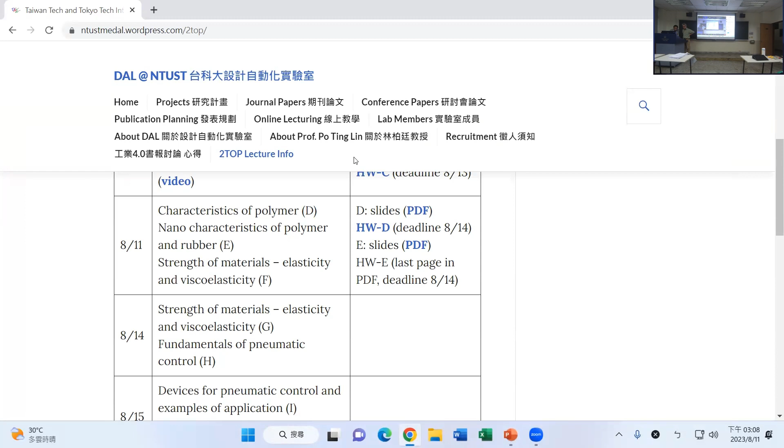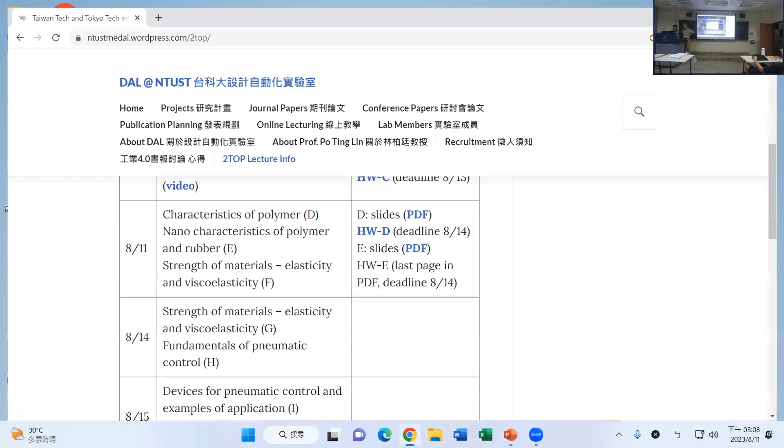Tired. Okay. Can everybody hear me? Can you hear me? And if you can hear me, you should be able to give me a thumbs up or something, right? No? Okay. Wait a minute. If somebody asks me a question, where am I supposed to go? Okay. If somebody sends me a chat or something. Chat, yeah. Okay. Oh, got it. Click the icon. And if they have any question. Okay. All right. Okay.

Good. I bet everybody is so tired by now and wants to get out of the class ASAP, and we can do that. But I'm getting paid, so I have to talk about something, right?

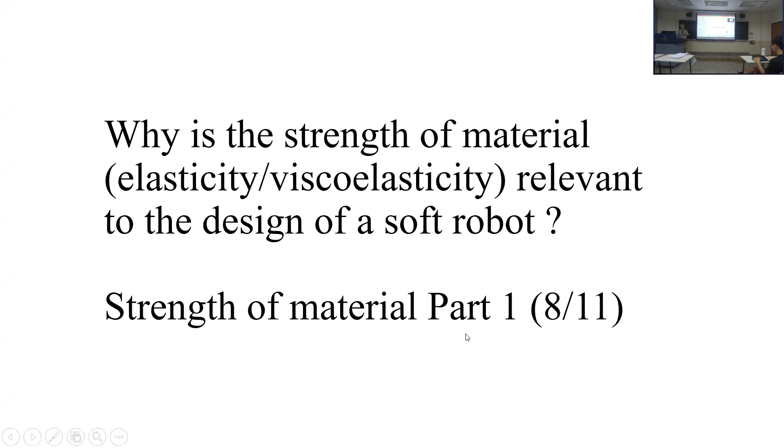So today I would like to talk about reviewing the statics and dynamics, so that you find out later we need to have the knowledge of strengths of material to design soft robots, more or less. So today's part is more like a review of the statics and dynamics. Good. All right. Here we go. Statics and dynamics. And here's the video.

Can I see it? Can I think to? Oh, okay. Here we go.

I found this website talking about the wall climbing robot. Can I play this? This is not exactly a soft robot we are thinking about, but part of this wall climbing robot is actually soft, right? Here's a robot sticking to the wall and gliding up. This part is hard structure, but you can see this belt is sticky and soft. So definitely we can treat this belt part, the caterpillar part, as the soft robot.

So basically, I will use this to review the statics and dynamics. And at the end, I hope I can convince you why we need to know the strengths of material. Okay. So here we go. This is the wall climbing robot, created by Simon Fraser, a university in Canada. So what we know is this wall is vertical.

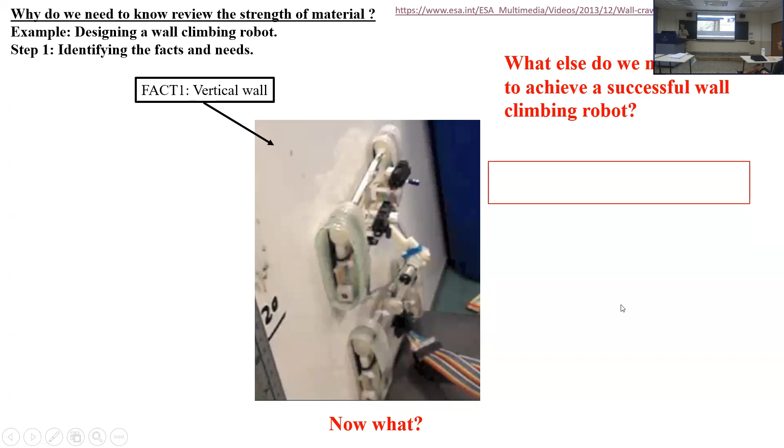All right. What else do we know? What do we know about this robot? There is a wall, and the robot is moving sideways, down or up, right? Moving up. Good. So something is moving, then that means I should be able to measure the acceleration and then later velocity, right? Good. And what else do we know?

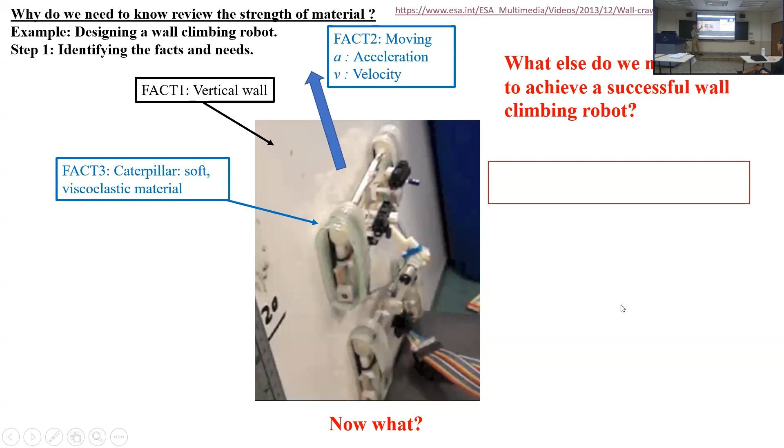Here we go. We have a caterpillar. As I said, this part is definitely rigid, but the caterpillar part is soft and viscous, sticky. Sticky material usually is viscoelastic, right? Are we okay? Then another part is, this structure has a weight. Each part, we can break this down into the caterpillar parts, 1, 2, 3, 4. And in the center, we have 2 links. Very crude, but we can build this as 6 parts, right?

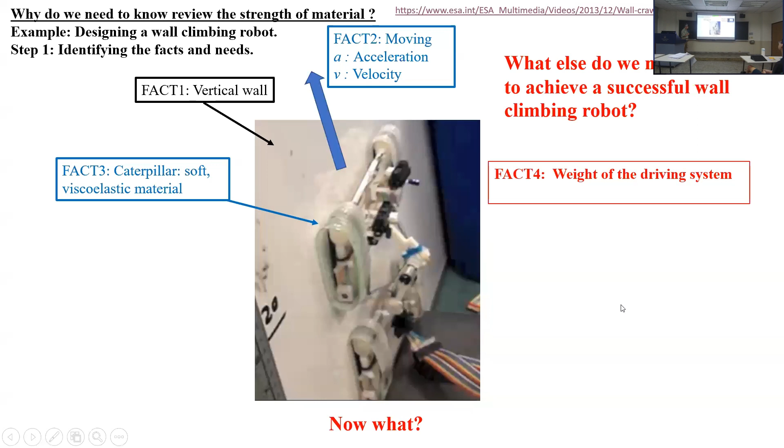Then another fact is we can simplify the weight of this caterpillar driving system as being at the center here. And also we see a link, right? Weight of the link. Of course, this is distributed. If you want to model this as a distributed loading, that's fine too. But at the first step of design, I think it's okay to build this as one mass concentrated at the center. So these are the weights of the links. Good.

All right. And there is another cable. Clearly, we can make a battery-powered system too, but this system had a cable. So if this robot slides up more, this cable will start pulling down, right? So tension force. Good. Then this is the basic specification of this specific robot.

Then what do we need to do after this? If you're a mechanical engineer, what do we need to do after these specifications are given? What do we usually do? What did the teacher tell you to do when you were a freshman or sophomore, when you took statics and dynamics?

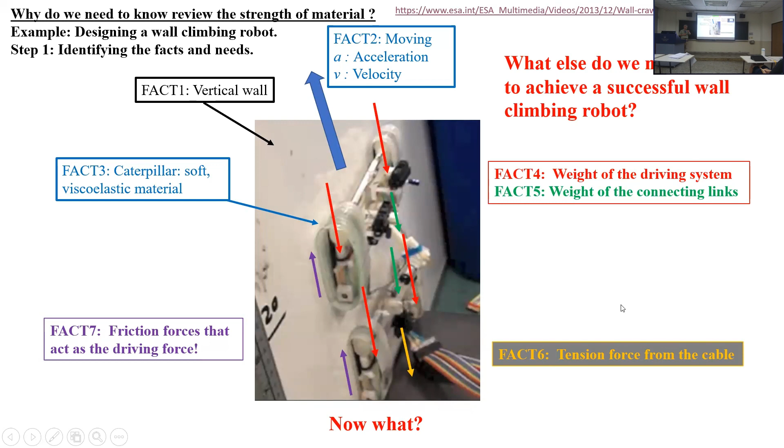So specifications are given. Then usually in mechanical engineering, we have to draw a diagram called a free body diagram. The idea of the free body diagram is pretty much like this, but we can build this from the side. The idea of the free body diagram is basically the structure with all the force information and the acceleration information, or inertial force information, put on here. That's called a free body diagram.

Of course, if you want a more detailed picture, you can do so. You can remove this link out, remove this link out, and draw 1, 2, 3, 4 free body diagrams—we can do so too. But in this case, we're only interested in the movement of the entire system, so I think this is okay.

So the next step is—this was the big picture—we have to somehow put this picture onto here. And that is called the free body diagram.

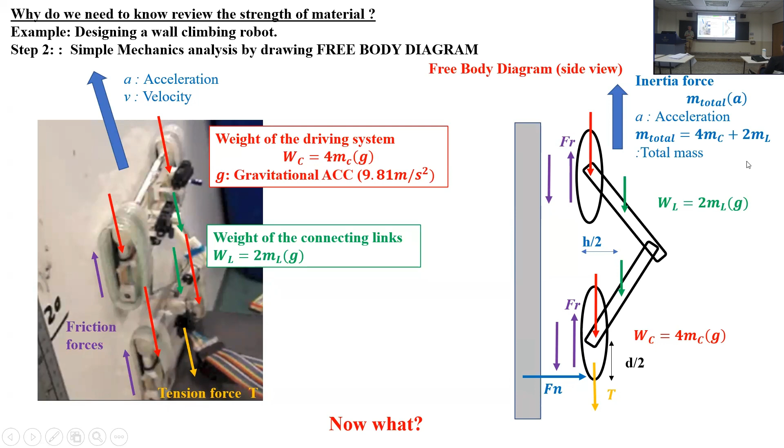So next step is setting up the equation of motion. We have X direction, Y direction, and this is basically moving up. So do you think we can set up an equation of motion in the X direction? How do you think, is this thing moving in that direction? Is it? Yes, no, the answer is very simple. How many of you think it's going to move that way? Or you don't care, that's another answer too.

So how about here? Oh, actually it may, right? Because now we have this. It may, you're right, you get confused, of course. But I'll conveniently say this is going to be ignorable because this is light and this is going to be small. So later I will say this will just be the 1D problem.

So in the Y direction, basically the major action is happening in Y direction. The equation of motion is basically F equals ma. Ma is total mass times acceleration, right? This side is inertial force, and the external force we have here is weight of the link, weight of the caterpillar, friction forces in Y direction, and tension force. This equation makes sense to you? As you can see, this is minus, this is minus, this is minus, so hopefully our friction force is bigger than this and this and this so that we can have acceleration.

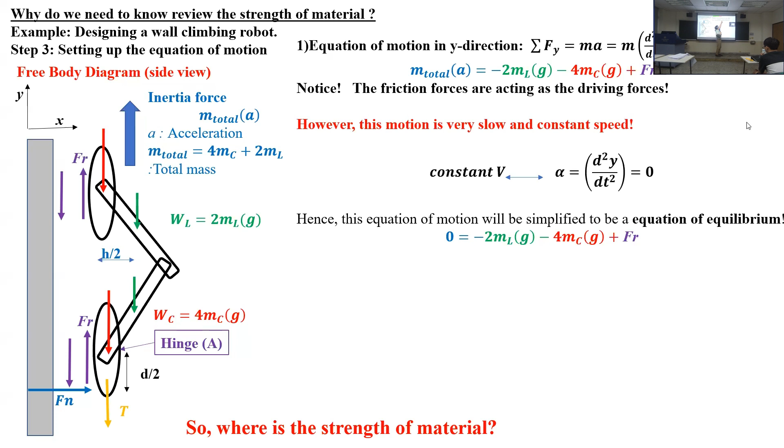No acceleration means this is 0, so that means this side is 0. Right, so constant velocity, acceleration is 0. So we can simplify this equation as this, and this is called the equation of equilibrium. So it's moving, it's still moving, so that feels like it gives us an impression that this is a dynamics problem. But since we all agree the acceleration can be viewed as 0 because of the constant velocity, then we can simplify this problem as a statics problem.

And the other thing is the rotational case. We have to satisfy the equation of equilibrium of the rotation, so we can set it up that way. But as you can see, that robot was not even trying to rotate, so we can say these two parts are very small, and we can ignore this and we can ignore this. So we can just stick to this. This is the equation we need to worry about when we are designing this kind of robot.

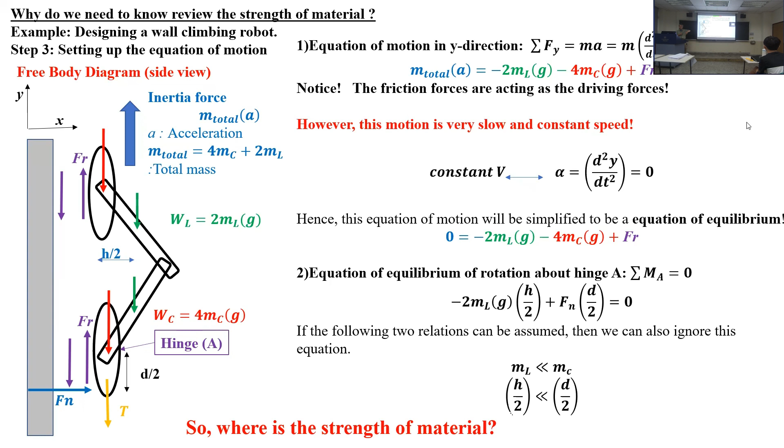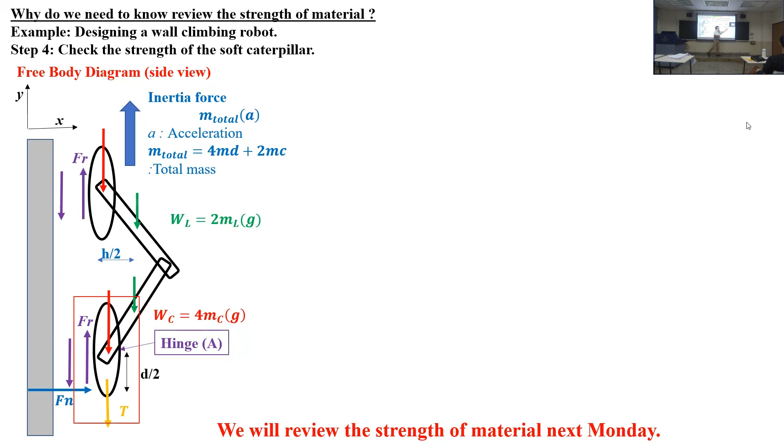And then next step is, finally statics is done, dynamics is done, free body diagram is done. Then we can find out the relationship of all the forces. Then finally we can talk about the strength of materials, that means what kind of force or deformation is happening at each small element. So let's see what will happen.

If you look at this caterpillar, let's assume this belt has certain thickness, elastic, viscoelastic. And on this caterpillar part, we have a weight — I should remove the W, sorry — and tension should be one force. And on this one, we have a friction. Can you see that? I'm enlarging this part to here.

Okay, when things start moving, this rectangular element will not stay this way, right? After I switch on, it's going to rotate and rotate. This one tries to rotate, and there will be friction happening here. So what will happen to this rectangular shape? Anybody? Are you with me? Assume there is no slipping happening. So this is going to rotate, but here's friction. So what will happen to this guy?

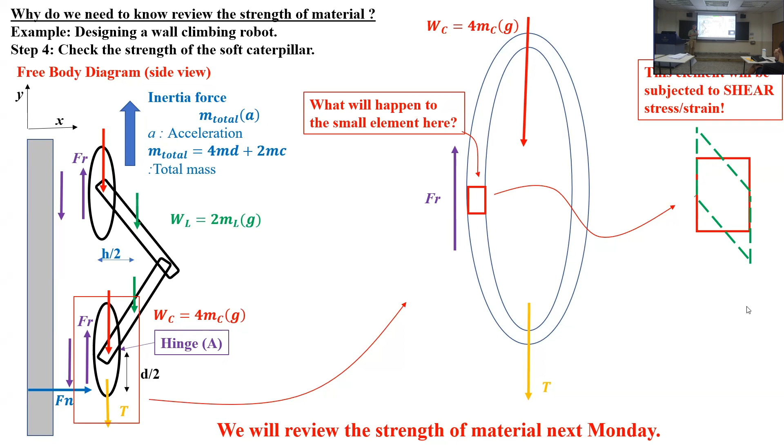Here we go. A little bit of finite element—oh no, sorry, strength of material. Let's say this is my shoes. I live in Tamsui. I commute by metro every day. I did that when I was in Japan too.

In Japan, trains are usually very packed. Have you ever been to Tokyo and ridden those commuter trains before? It's very much like a metro, the MRT here, but the MRT here will not be that packed. In Tokyo, it will be packed like twice as much. So once you ride in a packed train, you don't know who will step on you. That happens a lot.

So let's say yesterday I was riding a train, a huge guy, 150 kilograms, stepped on me—case one. And on the way back, a lovely lady, 45 kg, stepped on me. So if I tell you these two cases, which case do you think I was hurt more?

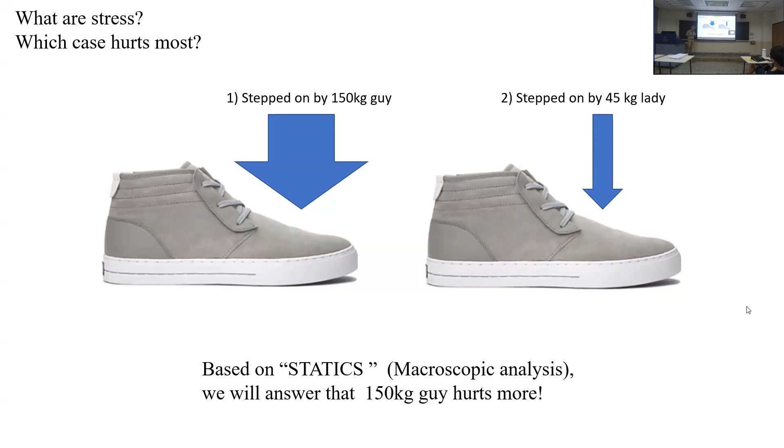Your guess. This part is sort of a funny joke. Good one, indeed. So most people will say, oh, the 150 kilogram guy stepped on you, so I must have hurt more in that case. Most people will think that way. But if I say the guy was wearing sneakers, while the lovely lady was wearing very pointy high heels, then the answer is completely different, right? I think everybody will agree this case will hurt a lot more.

Right? Why? Because the stress is different, right? Okay, 150 kg divided by this entire area, suddenly each area has smaller stress, but 45 kg divided by this tiny, tiny area, suddenly the stress is very high, right? Of course, if you step on my foot, this part doesn't hurt, this part doesn't hurt, but this part will hurt very much. Good?

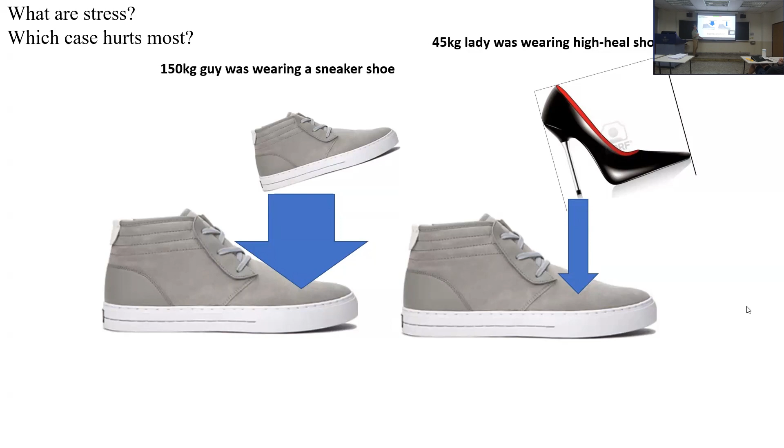All right. On the other hand, in this case, step on me, my foot will feel something, but no cell on my foot will be hurt. Good? So this is the sort of, I hope it's a good example representing the different stresses. So that's why instead of just looking at the sheer number, the macroscopic number applied to the material, we cannot just decide what will happen to the material just by looking at these macroscopic big forces. Instead we need to look at the microscopic element.

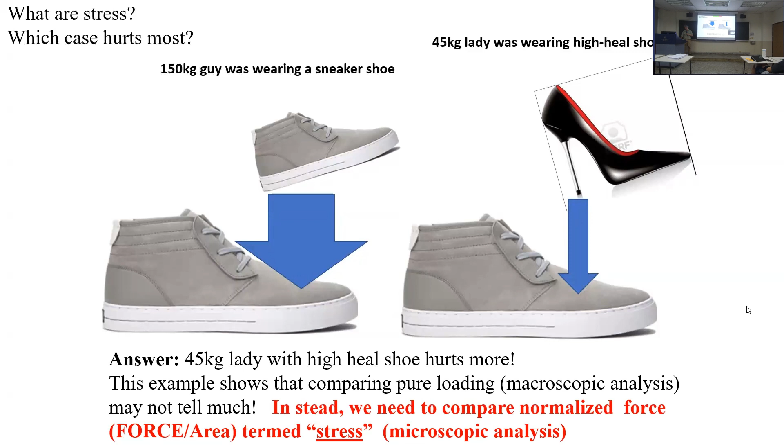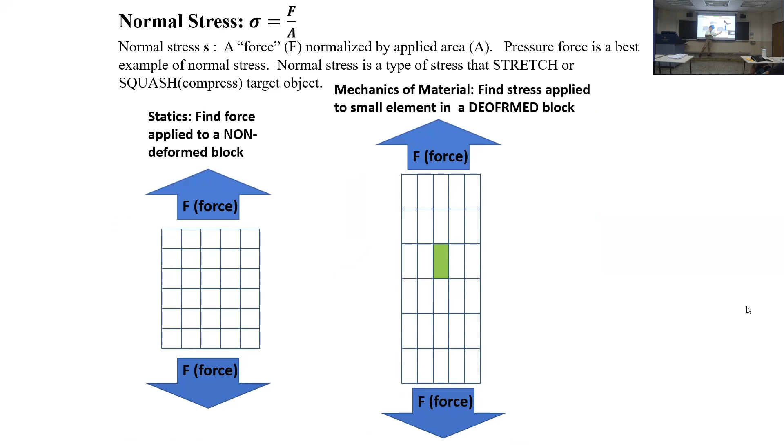That means applied force divided by area, and that is usually called stress, right? So if we have a cylinder bar subjected to the force, then the idea is we would like to look at each small element here and see what kind of force this element is subjected to. In this case, uniform force is applied, so we can say this element is subjected to a sigma. Usually we use sigma for the tension or compressional force, and sigma is clearly applied force divided by cross-sectional area, right?

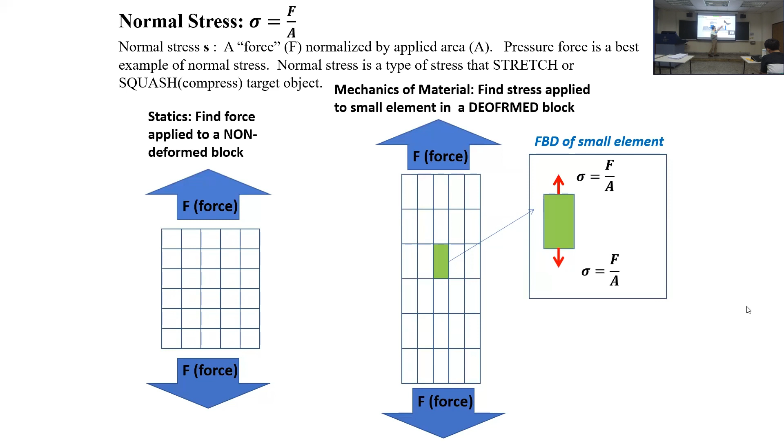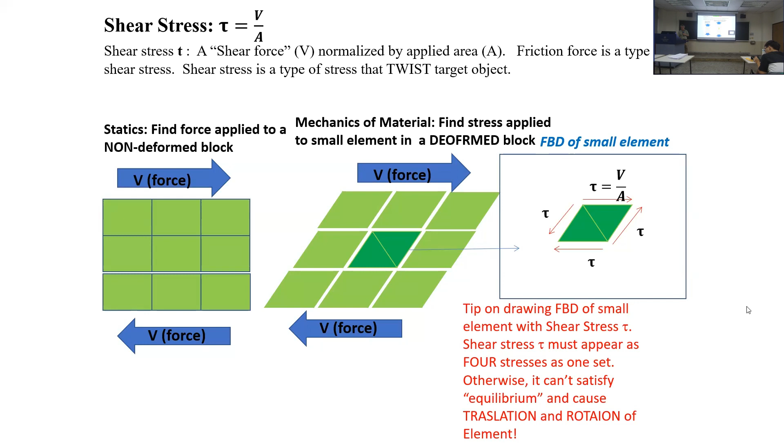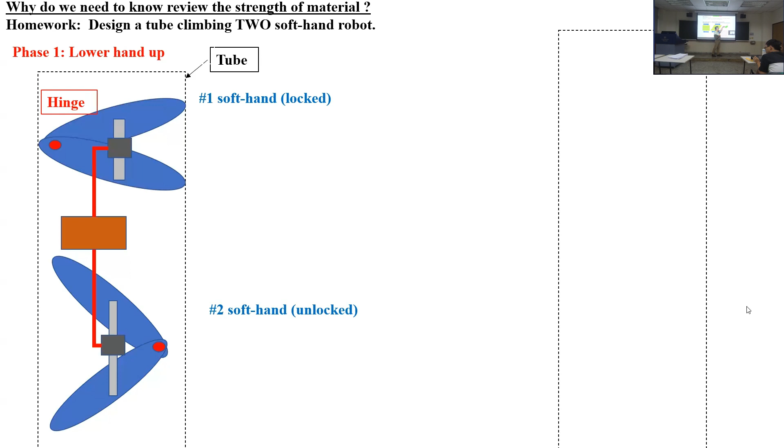And two elements shouldn't move independently, they should be connected. So if we do so and put another actuator here, then once stage one is locked, it's not going to move. Then this is unlocked, and we activate this main actuator, we can pull this one upright. Can you see it? Then this element has the main actuator, which is trying to bring the two hands of the robot closer or away.

I'll be honest with you. I'm not a robotics guy, so this picture may not make sense to any of you. If so, my apology.

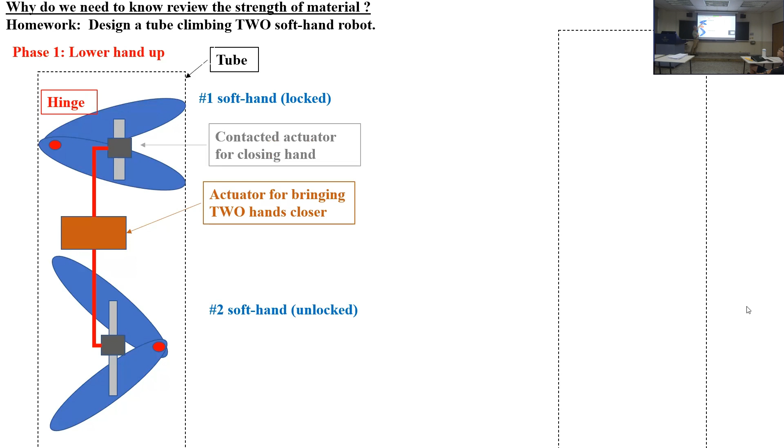And we have another actuator here. This actuator is going to elongate or contract the bar to open or close the hand. And clearly when this is closed, this end is touching the tube, so it's locked. When the actuator is extending this bar, the hand is completely open, or the mouth is open. Because of that, these ends are not touching, so it's unlocked. Make sense?

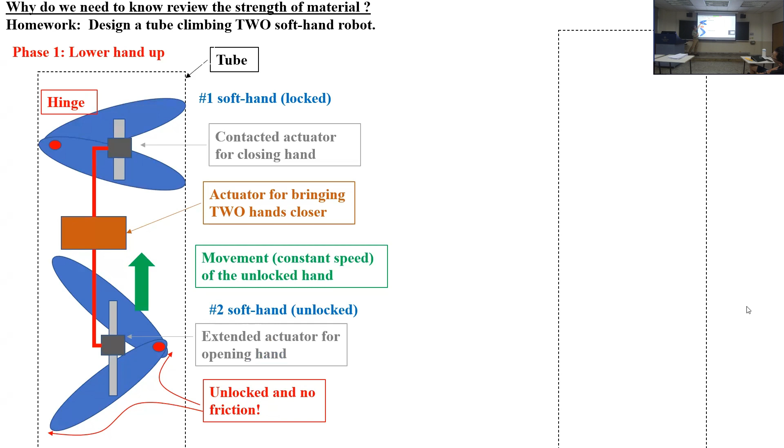So in this case, this is locked. This is going to activate. This is going to pull up. Then once that's done, when this moves up, close it, lock it, unlock it, push it, right? Make sense? I hope this will work. Any questions?

You can picture here's a link, and outside of the link is soft polymers. Of course, we can have the polymer here and here and here. That's good enough. We don't need to cover the entire link using the polymer. Any questions? Does this make sense to you?

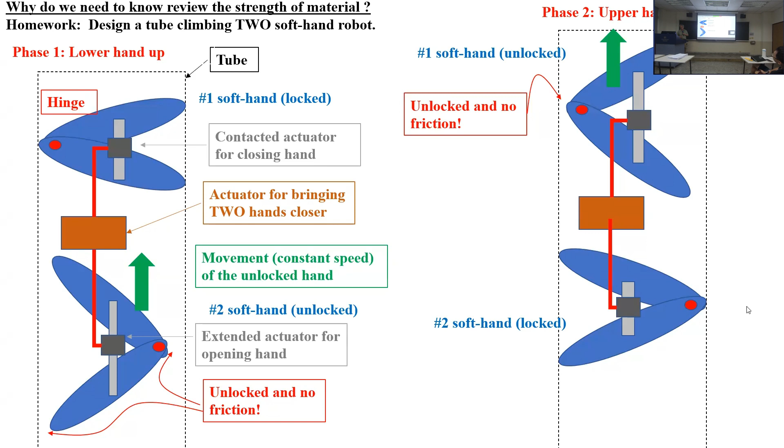Okay, all right. So here's the homework. Let's focus on this case. Top is locked. This is unlocked. This entire system is moving up. Good. This is locked, so this shouldn't move. And this bar is pulled inward by the actuator. And let's say this entire jig here is weight W.

Then I would like to find out, for this state to work out, meaning this is perfectly locked, not going to slide, stays there so that we can put this on, what kind of actuator force we have to apply here? What force we have to apply to this bar to pull this down, and this bar should be pulled upward. I call that the actuator force. Are you with me? All right.

So homework, first one, just look at this one. I want you to sketch the free body diagram, partially done. Upper finger, lower finger. I'm breaking this away, and of course I can put this one in the center too. Because this entire weight is W, super simplified, half of the W is carried by this finger, half of the W is carried by this finger. Rigorously speaking it cannot be right, but it's okay, we are simplifying the problem.

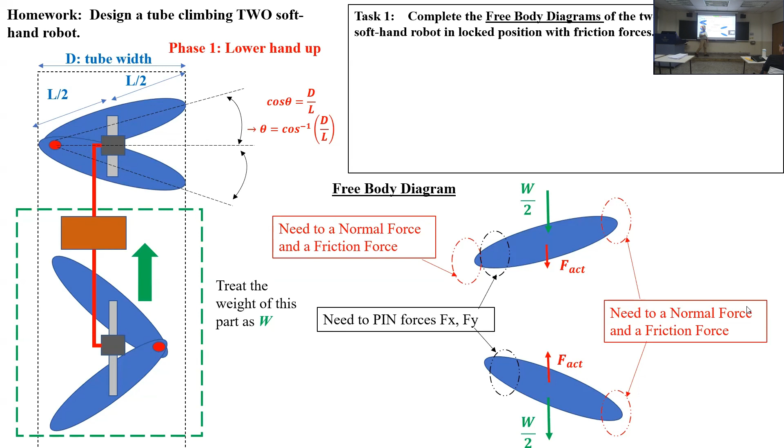Once that's done, you can set up the equations of motion for this one and this one. Since this is a 2D problem, potentially this can move in the X direction, Y direction, and we need to worry about rotation around the Z axis. So for each of them we should be able to set up three equations. And actually this part is not moving, so this is a pure statics problem. Without worrying about acceleration, we can say 0, 0, 0. Are you with me?

So complete this free body diagram, then use it to set up 3 equations here, 3 equations there, 6 equations total. Solving 6 equations simultaneously, I want you to find out what is F_act. That's the homework. Do it on a sheet of paper, or if you want to write everything on your iPad and send me the e-copy, that's okay too. This can keep you a little busy, but just a couple hours. All right, thank you so much.

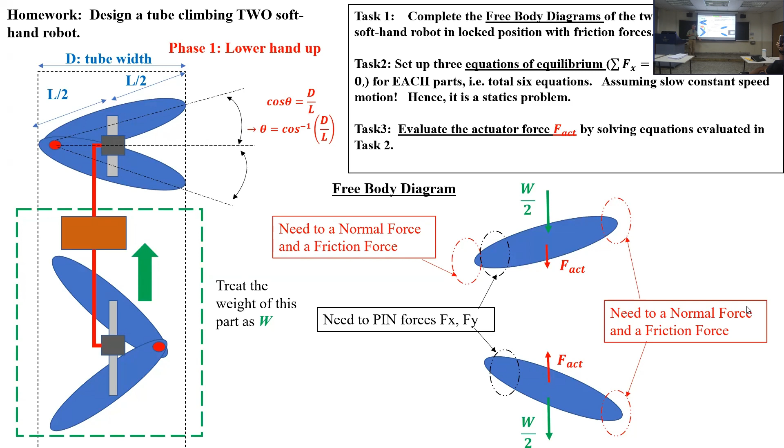But my recommendation is, today is Friday, so go out and have fun. Wake up early tomorrow morning, then finish it, and you don't need to worry about it. All right. Thanks for coming. That's it.